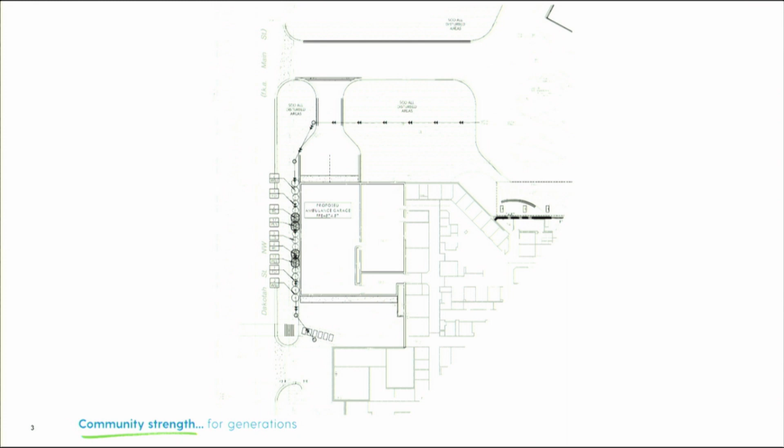Good evening, Commissioners. On the first item here again is a site plan extension for Mercy Hospital. I thought I would just put the site plan up in a rendering as a reminder of the project. This was approved by the Planning Commission on December 16th of 2021, and then approved by the City Council on February 2nd of 2022. Given that this project was in our Port District, it went to the Planning Commission on recommendation and then the City Council for approval. They were proposing an addition to their ambulance garage bay.

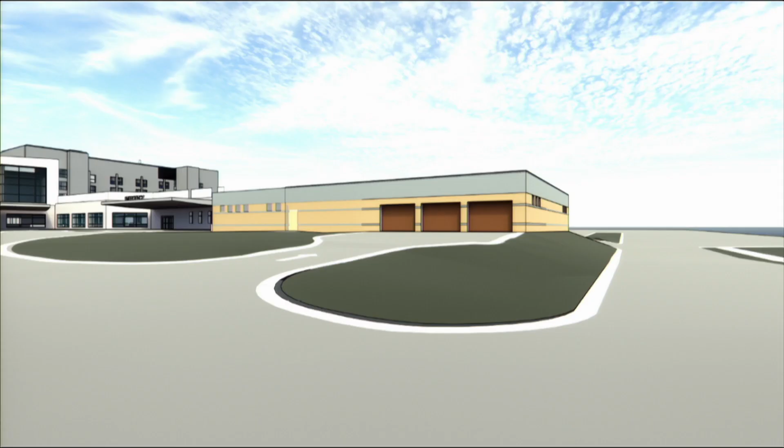This connects to their emergency department entrance and increases their ambulance bay, and here's a rendering of that project.

Staff had met with the applicant a while back discussing their construction staging on this project, and they indicated they were expecting construction in spring of 2023. Our site plan approval is good for one year, so their approval would have ended on February 2nd of 2023. Due to financing delays from Allina Health, there was a delay in starting this project, so we wanted to work with them to get that extension. The original site plan and rendering haven't changed; it was really just an unexpected delay from Allina Health on their financing. They're anticipating to move forward in spring 2023.

In their initial letter, the applicant had requested a 6-month extension, but after talking with our city attorney and community development staff, we recommended giving them the full year that can be granted, given that they are only allowed one extension. So if there's some other unforeseen circumstance, they wouldn't have to go through the site plan process again, since nothing has changed with the project. Our recommendation is approval for the full 1-year extension of their site plan approval, which would bring it to February 2nd of 2024.

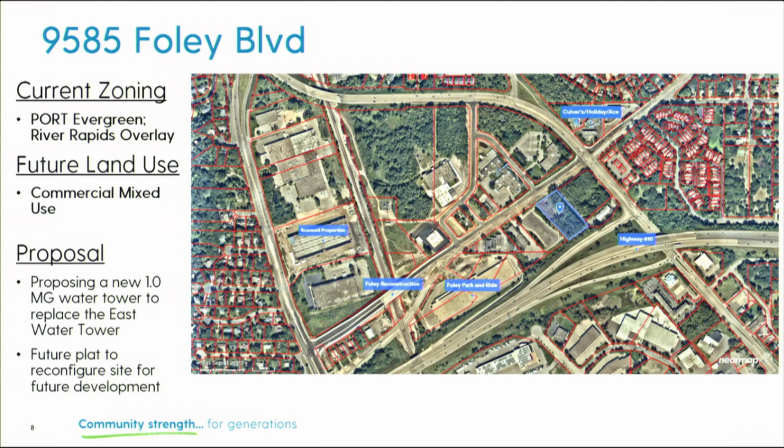The city currently owns 2 abutting parcels, and the intent is to eventually adjust the shared property line between the 2 lots, since the water tower doesn't need the full site. The water tower proposal site is currently about 2.2 acres, and the corner lot at Coon Rapids Boulevard and Foley Boulevard is 2.8 acres. We anticipate a plat coming forward maybe in February or March, with the corner lot becoming about 3.6 acres and the water tower site going down to about 1.4 acres.

On the site plan, the new water tower is proposed on the south corner of the site, south of an existing stormwater pond that was constructed as part of the Foley Boulevard overpass project. That pond would be expanded to accommodate the water tower and, I believe, a portion of any future mixed use or commercial development on the neighboring site.

The plan shows a chain link fence with slats around the base of the tower, and a small portion of a 24-foot paved driveway. Given the limited dimensional standards in our code for something like a water tower or public utility structure, we believe it wouldn't need to go through a full site plan review with its conditional use permit, but we wanted to give an overview of the layout of the site.

We still have some conditions with the conditional use permit criteria. One is that we'd recommend the chain link fence be vinyl coated, and we'd work with them to see if we want the slats or not on that fence, just to help with the appearance on the ground on the site.

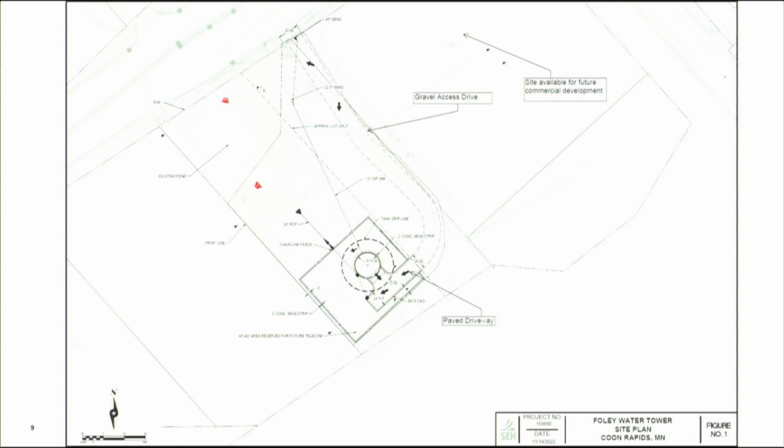There's a proposed temporary crushed stone or gravel access drive on the site, not paved right away, to maintain flexibility for any future access. Whenever there's a new development on that corner lot, we'd receive an easement agreement as a condition to maintain access to the water tower, and can work with that development on where the driveway would go. We want to maintain flexibility so we're not paving a driveway we'd have to rip up in a year or two and replace anyway.

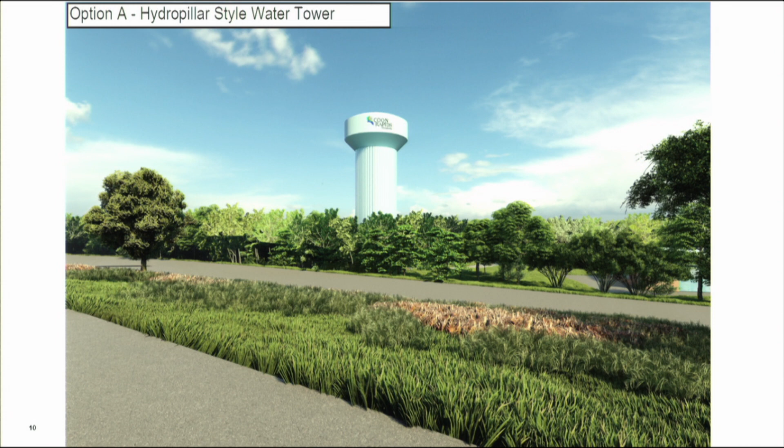With the application, they were showing two different examples of water towers. One being a hydropillar style, constructed entirely of steel and painted—that's option A. Then there's a composite style with a concrete support shaft and a painted steel storage tank on top. They're estimating the water tower would be about 180 feet tall on the site. This is a rendering from the view of Highway 10, to give you an idea of what the tower would look like.

In their conditional use permit criteria, the main condition I highlighted was to preserve and incorporate the site's important natural and scenic features into the development design. The applicant, Public Works, and the team would work to preserve existing trees as much as possible on the site, knowing that a fair amount would probably be removed on the southern portion of the site to accommodate the tower.

We're requesting they incorporate additional landscaping where feasible around the stormwater pond to help screen the site along Foley Boulevard. We as staff recognize a water tower is pretty tall and hard to screen, but at least at street level, for people walking or driving by along Foley Boulevard, some additional landscaping could help soften that view from the ground level. The applicant noted that landscaping might be limited since we wouldn't want plantings above any piping, and they need to maintain space around the tower for maintenance. But we want flexibility to work with them to provide additional landscaping where we can.

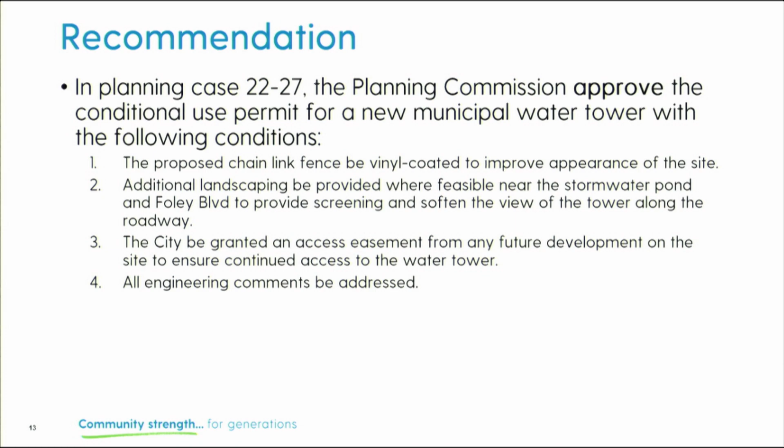Thank you, Mr. Kroll. Commissioner, any questions for Mr. Kroll? Mr. Chair, Commissioner Geisler?

Mr. Kroll, I know some of our other water towers have barbed wire on top of their fences. Are we no longer doing that, or is that something we want to prohibit here, or something we plan to do? Yeah, I don't think that would be something we'd recommend here. It's in our code that barbed wire fence is prohibited, so I think some of those other fences might be grandfathered in as a non-conforming use, so I wouldn't recommend that here.

Chair Schwartz, Commissioner Knobloch has a question for Mr. Kroll. For the water tower, between option A and option B, is there a cost difference or a functionality difference between these two options? I'm just curious—it might be good public information.

Yeah, that might be a good question for Mr. Himmer. That I don't know. I can certainly answer that question, Commissioner Knobloch.

Commission, we are going to look at both styles, we're going to bid them to see what the costs would be. Typically the composites are a little cheaper from the concrete standpoint because the long-term maintenance is less—you don't have to paint that entire column. However, they haven't been out there long enough to determine how long that concrete will stand up, so there are a few that are starting to spall and rust, and they end up painting them anyway. So when we bid both, we'll look at the life cycle costs over 50 years to determine the best value, and then the council will decide.

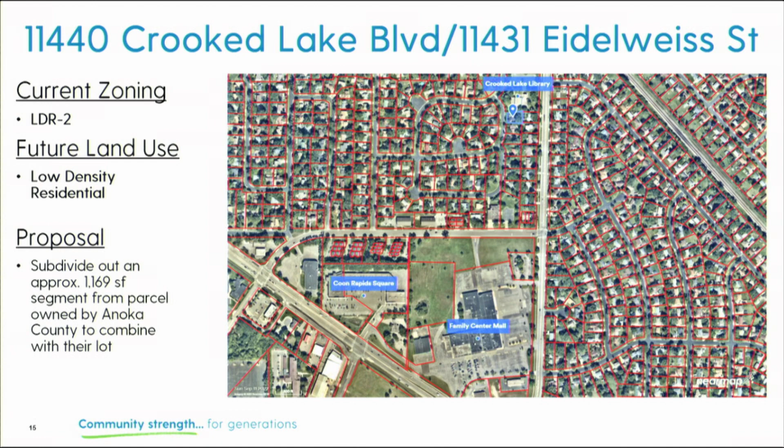On November 8th of 2022, the Anoka County Board of Commissioners adopted Resolution 136, authorizing the conveyance of the Anoka County property in question and approving the proposed lot split, selling the requested segment to Michael and Janine Nielsen. Here's an aerial showing their current property line.

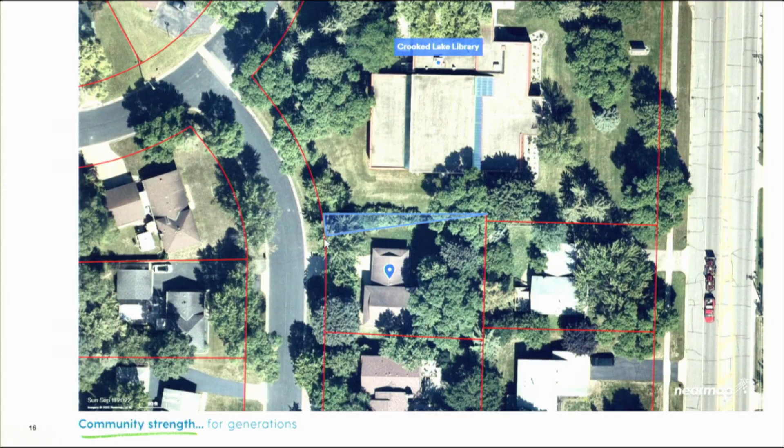It's this bottom portion here. It does angle down, and the proposed lot split and segment would help square off their property. This was the survey that was part of the application, again showing the existing property line between the two parcels currently here, the southern line. With this lot split, it would be adjusted to this new northern line here, to square that off.

There weren't currently any dedicated drainage or utility easements along this impacted boundary, and engineering and legal staff didn't feel there was a need to dedicate any new easement with this lot split. Given that the library would be here for a long time and this would remain a single-family home lot, the lot split isn't creating a new parcel for development. It will be combined with that parcel to make the existing lot with the single-family home just slightly larger.

So we didn't feel a need to attach an easement there, and there aren't really any other conditions typically attached with this. Given there wasn't really a need for easements, our engineering staff didn't have any additional comments on the project either. So in planning case 22-26, we'd recommend approval of the proposed lot split. I thought about adding a condition to combine it with that lot, but given the process Anoka County outlined, how they wrote out the legal descriptions on the properties, they would file the parcel combination to do that.

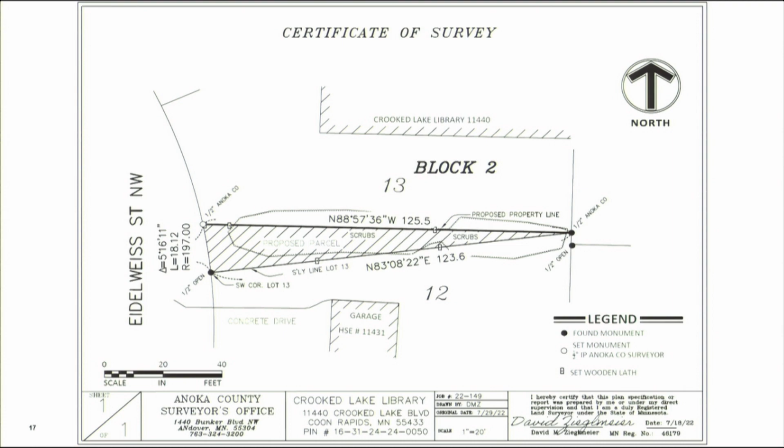Is there anything the petitioner would like to add? All right, just turn to questions. The commission has no questions.

I will open a public hearing in this matter. Public hearing on planning case 22-26 for the lot split for Michael Nielsen at 11440 Crooked Lake Boulevard Northwest and 11431 Eidelweiss Street Northwest. Anyone wish to speak to this public hearing? Anyone wish to speak? Seeing none, close the public hearing and limit comments to the commission.

Mr. Chair, Mr. Geisler: I move that in planning case 22-26 we recommend approval for the proposed lot split. Second. Motion by Geisler, second by Knobloch. Any further discussion? Hearing none, all in favor? Aye. Opposed? The motion carries.

This is a recommendation by the Planning Commission and will be heard by the City Council at their January 17th meeting. Good luck.

All right, our fourth case this evening is planning case 22-25, a conditional use permit for 3050 Coon Rapids Boulevard, LLC, Seamless Gutters and More LLC. Mr. Kroll: So our final case tonight, the applicant is requesting approval of a conditional use permit for a gutter repair business with office warehouse.

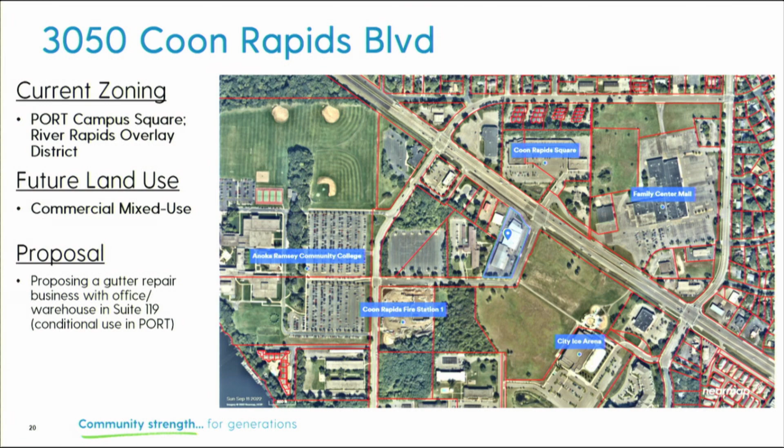So the applicant would be operating a small gutter company with space being used to store work vans for the business as well as any materials used for the jobs. Seamless Gutters and More often works as a subcontractor for roofing contractors, and they offer installation of seamless gutters and gutter covers. The applicant would not be providing any services out of Suite 119 here, and again would just really be used to store their work vans and the materials that they use for their sites.

They indicate that they have 5 active employees and operate February to December from 6 a.m. to 8 p.m. And then I just noted that the entrance and the overhead door to the business is on the west side of the building that I'll show here.

So we did have some updates, I think, from our last meeting when we talked about Suite 115, just to some of the tenants in the space. I had actually called the business owner of NJR Gutters that was in Suite 114 that operates a similar business to the applicant, just to understand their parking needs and get some information on how they've been operating their space, given the parking requirements and a number of things that would apply to this applicant apply to NJR Gutters.

Through that phone call, the business owner had indicated to me that they had moved out of Suite 114 in mid-October, and I did confirm this with the property owner as well. I just wanted to talk about it a little bit more, as I know parking is often a consideration at this site, so I'll go into more detail there, but knowing that maybe there was going to be some concerns about being able to reach their parking minimums on the site, we now have a vacated Suite 114.

The other item I would just note is that I have talked to the business owner at Citywide PPF and Auto Detail that's in Suite 116, and they have shared interest in potentially expanding into Suite 117. If that were to happen, I think we determined that they would need a conditional use permit for that suite as well, given the nature of their business. We haven't received an application for that CUP yet, but I just wanted to put that on here, and I'll account for that in the parking discussion as well.

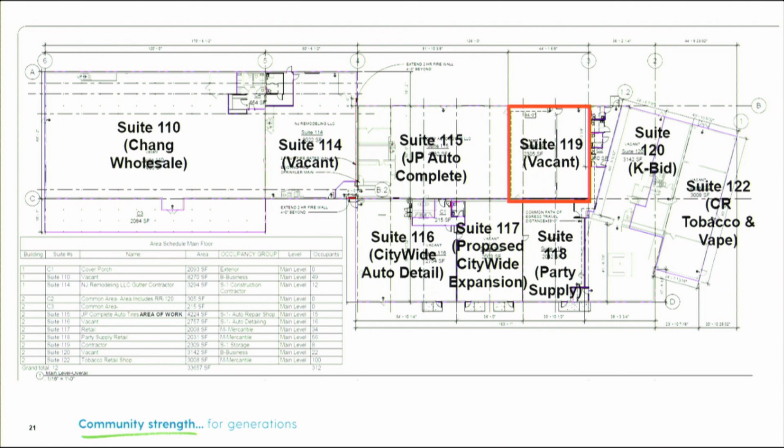So just wanted to share those two updates at 3050, given this is a multi-tenant building, but then again tonight focusing on Suite 119 that's highlighted here in red. So this is the floor plan that they had. It's about a 2,309 square foot space. Let's see, where's that?

You'll see the left, or western half of the space, where the overhead door is to the north. This warehouse section would be used for storage of the vans and some materials. The eastern half of the building is labeled office, where they'd have a small office area and some additional storage. There's a shared hallway and restrooms used by this suite and a couple of other tenants in that part of the building.

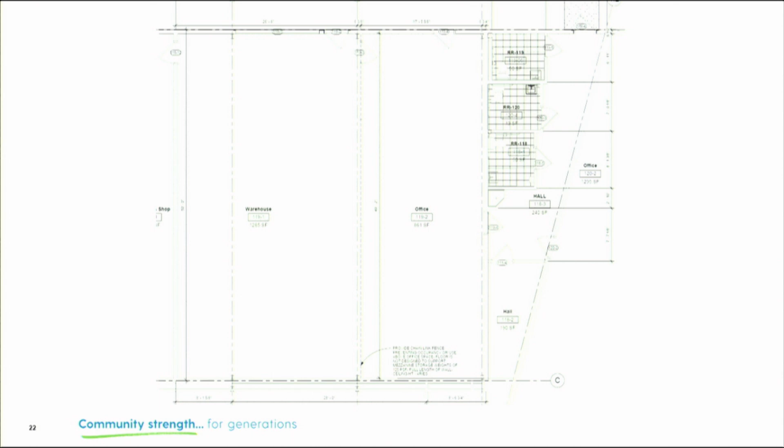Just to give you an idea of the space itself, the application and floor plan noted a chain link fence would be installed. There is a mezzanine there that is a known building code issue, since it can't support the minimum storage weight needed. So they indicated they'd install a fence to prohibit access or storage on that mezzanine. I added it as a condition to clarify that they'd install the fence before a certificate of occupancy is issued, and that the applicant would occupy Suite 119. I did want to note there was a typo on the staff report.

I originally had another condition under letter F about circulation and parking, intended for the reciprocal easement agreement discussed with Suite 115. Since this suite is on the western or northern side of the building, I don't anticipate vehicles needing to cross over to 3060 Coon Rapids Boulevard to access this suite, but if they did, that reciprocal easement would just benefit the whole building at 3050. Talking with Grant, our community development director, he recommended taking that out, so we're not implying they need two reciprocal easement agreements—it would just be one agreement covering the whole building. We removed that, but I didn't catch it in all the spots in my staff report, so I apologize for any confusion there.

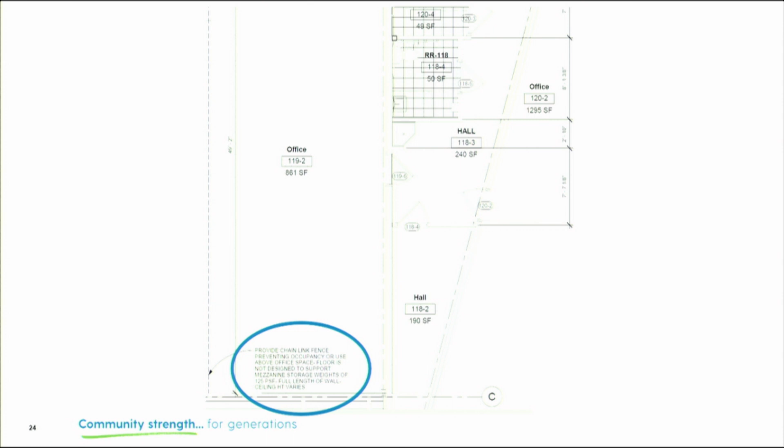For parking in this space, the warehouse portion requires one parking space per 2,000 square feet, so in this case it requires one. The office portion requires one parking space per 200 square feet, requiring 5 spaces, for a total of 6 spaces for this business. I did receive from the property owner a comprehensive parking plan showing those 6 spaces. I noted that to get those 6 spaces, he shifted the spaces over by one, so now there's one less parking space dedicated for the Coon Rapids Tobacco and Vape Shop at the end.

Given some of the recent tenant turnover in the space, based on the existing uses on the property, I think it requires a minimum of 81 spaces, and this plan shows about 79 spaces allocated a little oddly, but overall there are 89 spaces at this site. I want to focus more on the fact there are 89 spaces, and this table tries to show, based on existing tenants, what the minimum parking requirements would be under our code, and how it's currently allocated on that plan—showing some suites providing more spaces than the minimum, and some providing less.

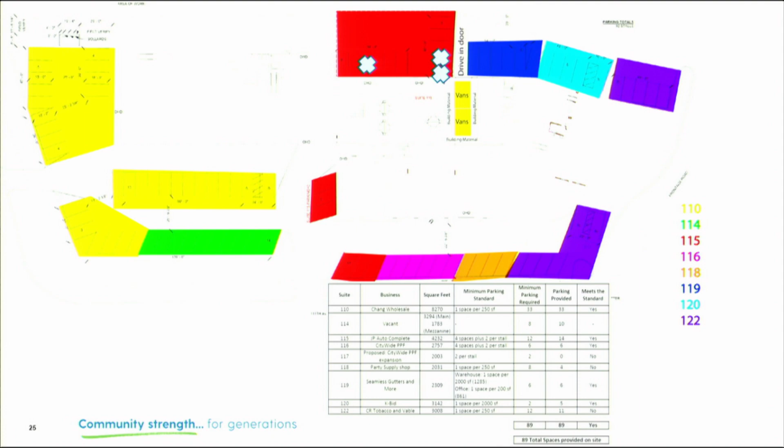Can I just make one clarifying comment on the 91 spaces? I believe you're correct that some of the plans we've received in the past showed 91 spaces, but those 91 spaces show kind of striped spaces in front of overhead doors, or in the case back by 115, that don't actually meet our standard dimensions for a vehicle to be able to properly back out and turn around. And so that's where that 89 comes from, based on the information I've been given by the property owner and from my site visits there. This is the best estimate that I have, but I'm happy to continue to work with the property owner to get additional information and keep modifying and updating it. All right, thank you.

Any other questions before we have a public hearing? All right, this time I will open a public hearing in planning case 22-25 for a conditional use permit at 3050 Coon Rapids Blvd, Seamless Gutters and More LLC.

Anyone wish to speak to the public hearing? Anyone wish to speak to the public hearing? Seeing none, close the public hearing and limit comments to the commission.

Mr. Chair, Commissioner Geisler. I just want to make some general comments on the parking thing. I think we need to look at the site as a whole. That's the big piece there.

My concerns from the last meeting about parking were really more around the fact that, based on the intensity of the uses currently there, it seems hard to fill the vacant pieces. So my concern was, if we got more intensive uses in those vacant properties, would we have enough parking to continue to go? As this stands right now, there's enough parking to meet the current uses, and I'm okay with that. I just think as we progress and buildings get fuller, and hopefully tenants stay around and get used, it may become more difficult to continue to meet that parking standard as a whole.